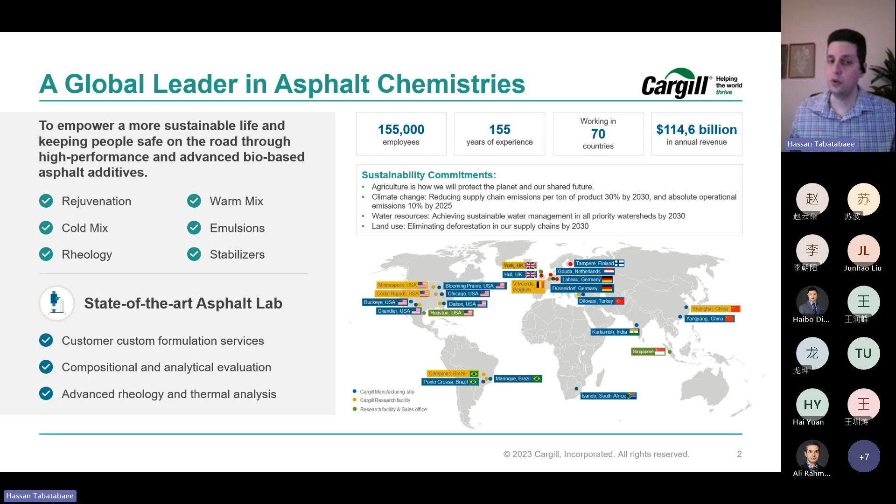Before we get too far, we have the pleasure of working with an esteemed partner in China, the Xiyufa Group, and my dear partner from this company, Mr. Xi Jianxin, is also online, and I'd like to ask him to maybe introduce himself and the company if possible.

Hi. Hello. Can you hear me? Hello. Yes, we hear you. Hi, Hassan. Really nice to meet you again. Absolutely. Nice to meet you. Yeah, good to see you. Thank you. Hello, Professor. Sorry, I'm at the airport.

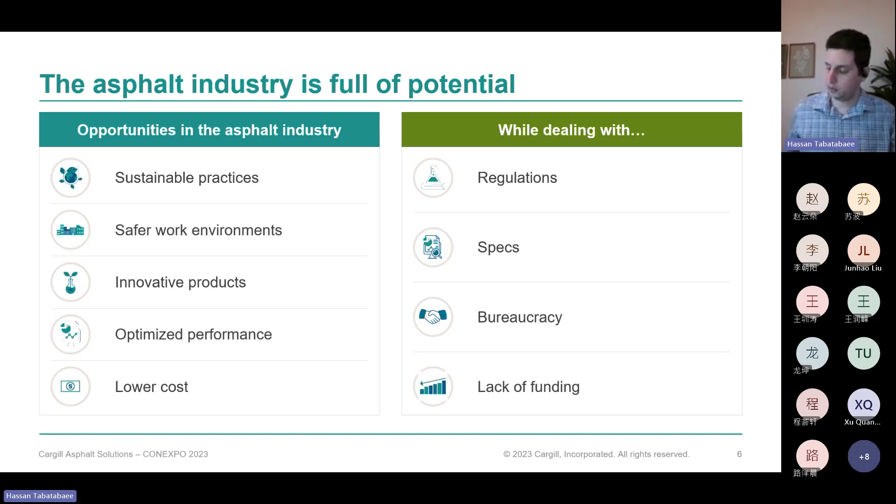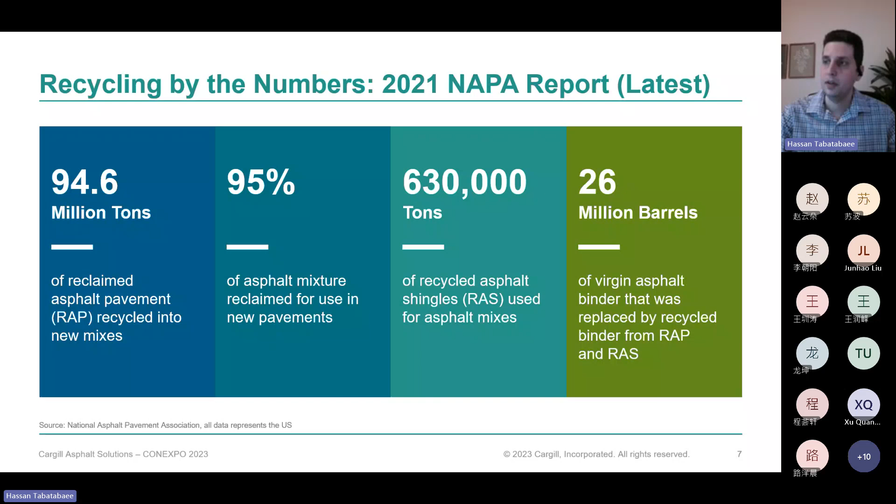Significant amounts of this exist and can be recycled, and this would be equivalent to replacing about 26 million barrels of virgin asphalt. Now, this number of 95% is very promising, very impressive. However, when we look at different statistics we see a different picture. In the US, between 2018 and 2021,

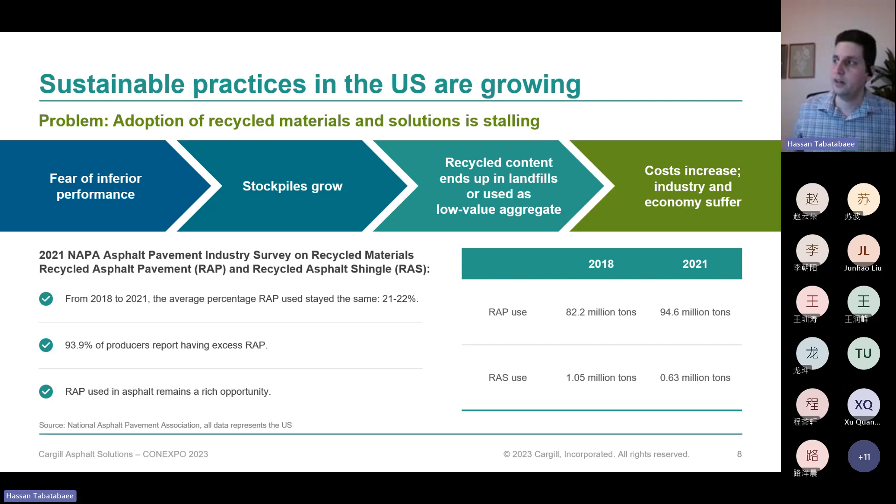although RAP use went up to an extent, it has stayed very consistent as a percentage of total asphalt volume. About 21-22% of asphalt uses recycled material, which is a very low percentage when we look at the opportunities we see in a number of countries with the percent of recycling that's possible. So although 95% is recyclable, very little of it is actually being recycled on average.

When we look at the carbon footprint of asphalt using environmental product declarations, which are becoming more common as report cards showing carbon footprint and emission potential, we see a significant portion comes from the asphalt binder, much less from the aggregate. This is followed by the energy spent operating a plant and heating and drying aggregates.

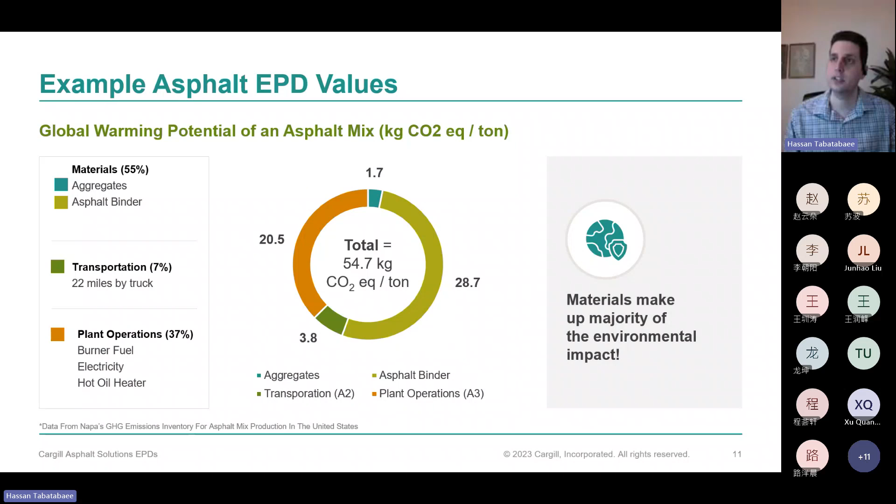So energy for heating and asphalt binder production are the two biggest contributors to the carbon footprint of asphalt, and those are the aspects to focus on significantly when reducing carbon footprint. That's where bio-based technologies come in and have started to be used.

First off, what do we mean by bio-based? This definition can be pretty broad. At the broadest level, it can refer to materials derived from vegetable or agricultural sources, tree-based sources like tall oil, carbohydrates like starches, sugars, proteins and derivatives, byproducts from processes such as fatty distillates, recovered oils, waste products from refining, pyrolysis byproducts, cellulosic byproducts like lignin, husks, nutshells, and animal sources. So a lot of very different materials could fall under the characterization of bio-based.

In the asphalt industry, bio-based has often been used to describe bio-oils, although there are many different types of products referred to as bio-oils.

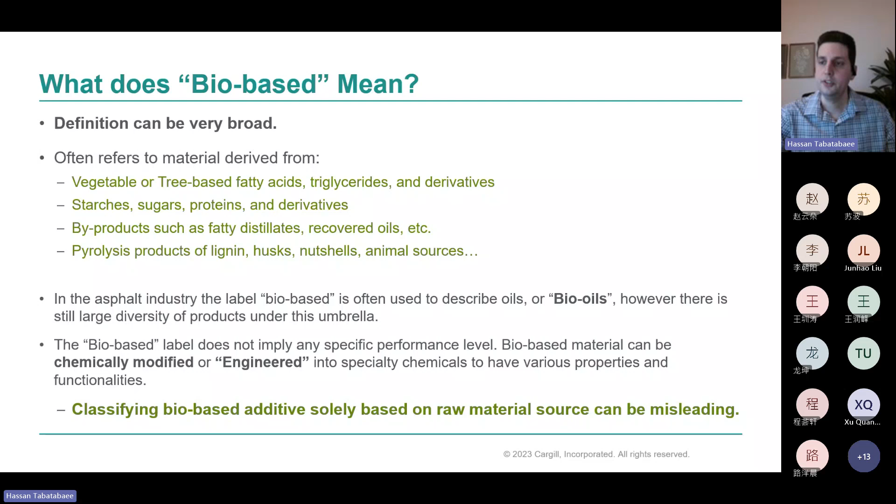One important thing to keep in mind is that being bio-based, given how broad the source materials can be, doesn't actually imply any specific type of performance in itself. Sometimes papers say biomaterials are very good or very bad in terms of some aspect like aging, and these claims are misleading because you have to specify exactly what you're talking about, since performance varies and many of these materials can be chemically modified or engineered to have different properties. So saying something is vegetable oil based doesn't necessarily mean the same thing depending on how it's chemically modified. Classifying biomaterials only by raw material source is misleading—more information is always needed to characterize performance.

So how are these used in asphalt? One of the methods used the longest, though perhaps not as commonly known, is using bio-based modifiers to modify asphalt binder or bitumen. These are often very efficient replacements for aromatic distillates or other petroleum-based oils used to soften asphalt. Here's an example showing performance grade modification from a PG 64-22 to PG 58-28.

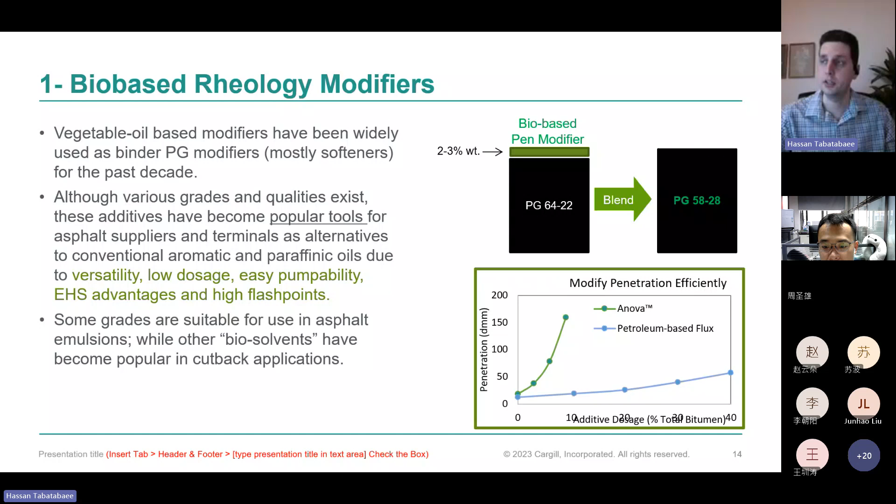Only 2 to 3% by weight can achieve a full grade change. For those familiar with the performance grading system, one grade shift of 6 degrees means cutting the viscosity about in half. Looking at penetration, you see a similar range where 0 to 10% of a bioadditive can have much more impact than a flux oil might have. For this reason, these have become quite popular for modification of asphalt binders and creating softer bitumen grades.

Another category where bio-based chemistry has more recently become common is warm mix or low temperature asphalt. In this category, organic additives have commonly been used in the past. The term organic does sound like bio-based, but that's not necessarily the same thing. Fischer-Tropsch wax, which comes from coal processing, has often been used to plasticize asphalt by creating a melting point near the processing temperature, allowing for lower temperature processing as a plasticizer.

However, their use is not as common in North America and Europe. What has become more common is the use of chemical warm mix additives that are surfactant-type modifier products, able to work without modifying the grade of an asphalt binder. Although these have commonly been amine-based chemistries, more recently there are more bio-based versions coming into the market.

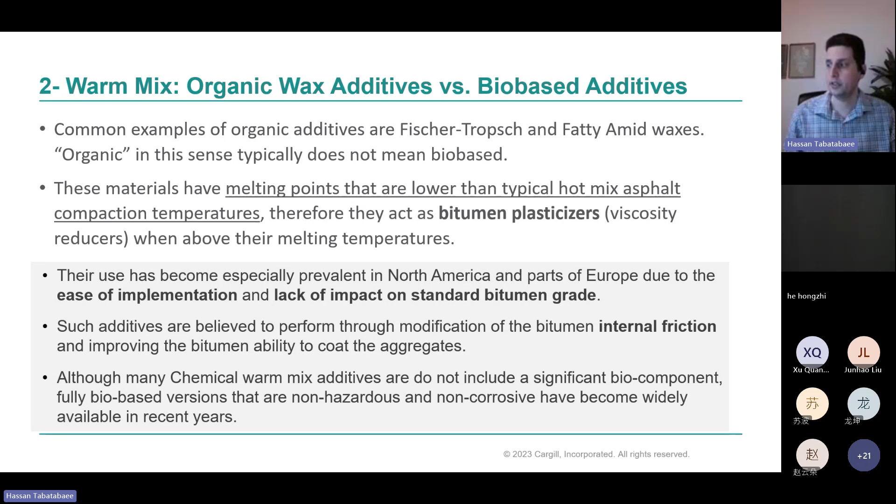When we talk about chemical warm mix additives, these are additives believed to perform by modifying the internal friction in a bitumen film, which allows for better movement of aggregates, workability, and compactability. They also, as a byproduct of that impact, often work as wetting agents. They modify the surface energy and surface tension of an asphalt binder and the bond characteristics at the interface between bitumen and aggregate, and can help as adhesion promoters.

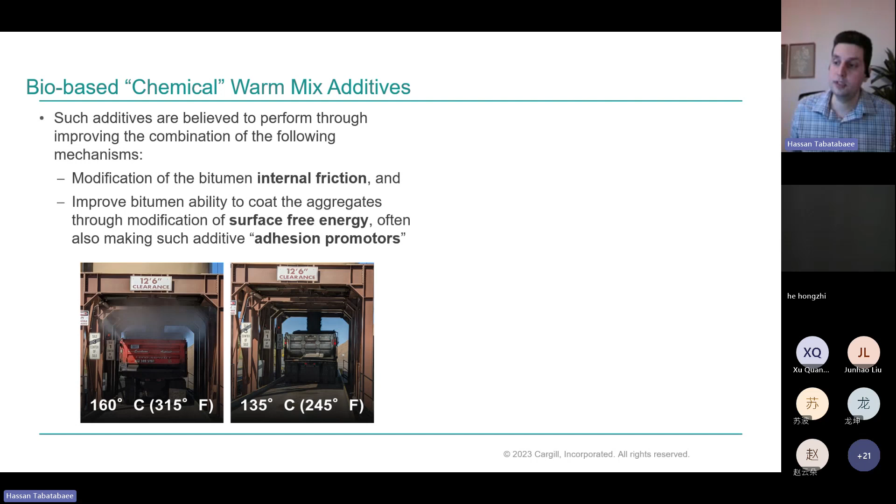What makes these more attractive than a wax is the fact that they do not change the grade of the bitumen. As you can see, you can achieve significant drops in production temperature, and sometimes much lower than the temperatures even seen in this example with the use of such additives.

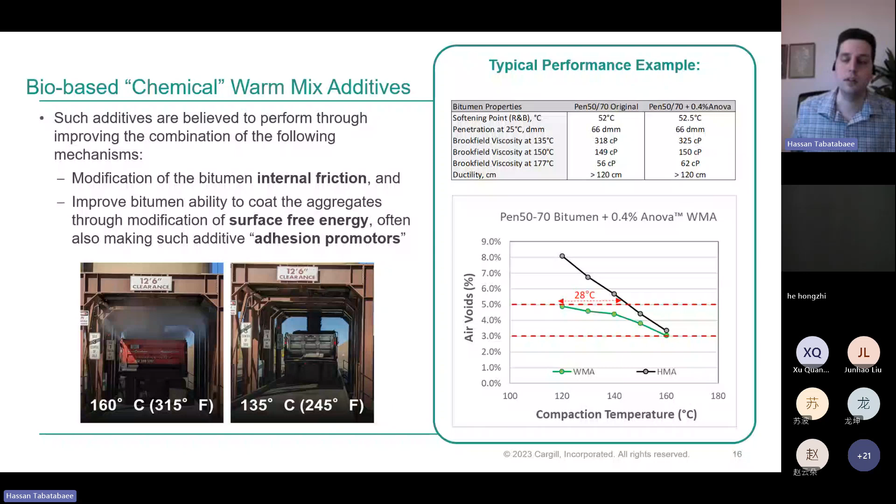And you can see at certain points there's a significant shift in the compactability temperature. You're achieving similar air voids with the warm mix at 20 to 30 degrees lower temperatures than you would with the hot mix alternative. That means lower fuel use and lower carbon footprint.

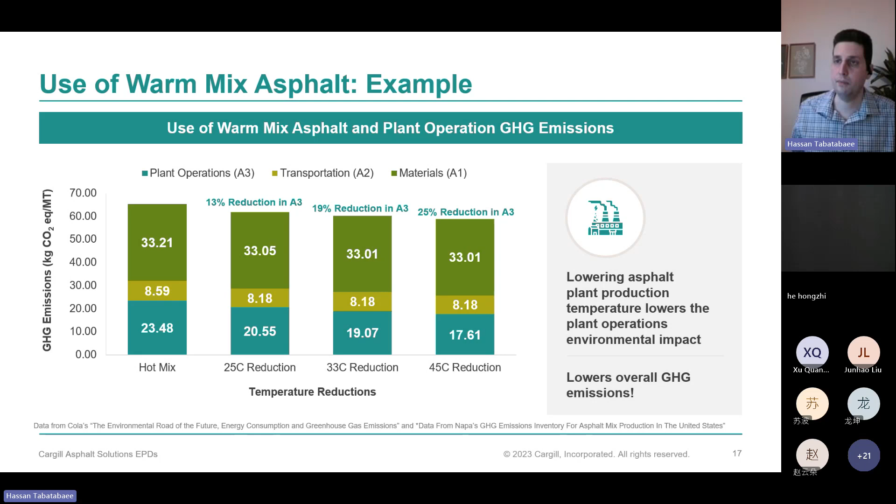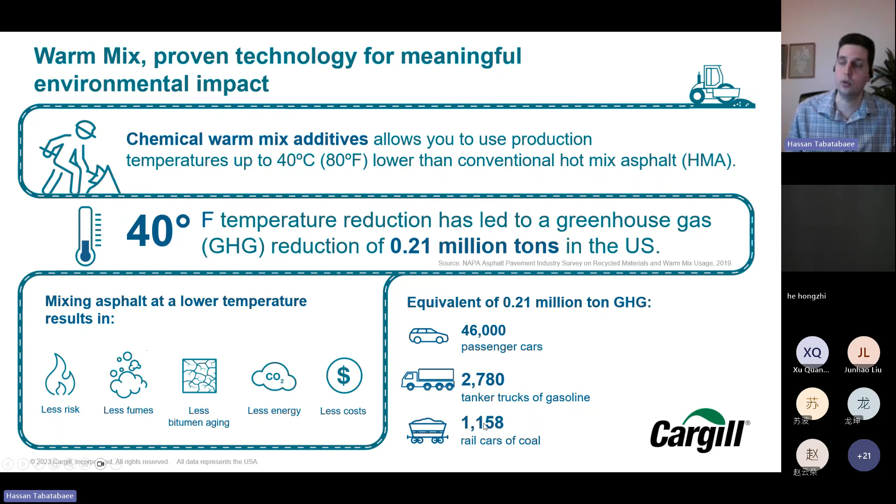Looking at that, it's estimated that in the U.S. alone, if a 40-degree Fahrenheit reduction in temperature was implemented using a warm mix additive, about 0.2 million tons of GHG would be reduced, which is equivalent to taking 46,000 cars off the road, or reducing about 1,000 rail cars of coal. These can start making a difference.

Now, the last category that I'll focus on more is the recycling agents. This is where bio-based technology is becoming probably the more popular version that's being used in some markets, especially in North America and Western Europe.

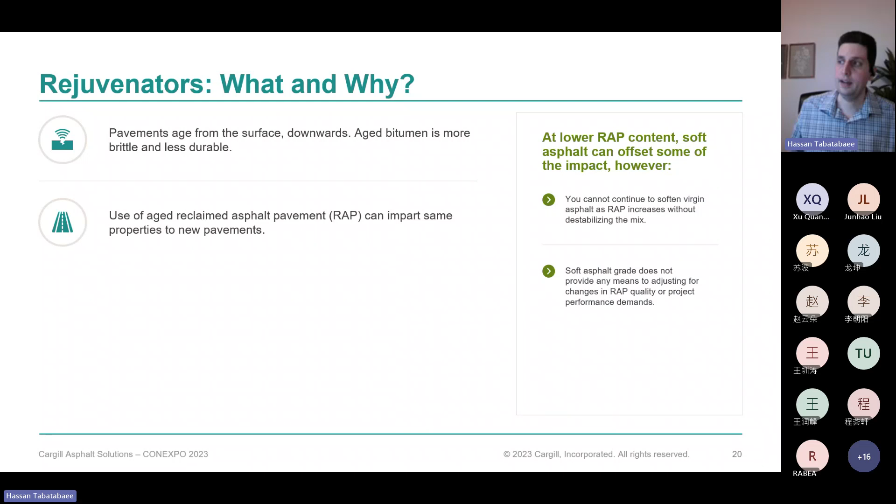So rejuvenators or recycling agents aren't a very new concept, they've been used for a while. They've been used because, as you know, asphalt ages and becomes brittle, and to use more of that recycled pavement, you need to soften it.

Back in the 1970s and 1980s, the use of petroleum-based recycling agents, which were mostly based on lube oils and paraffinic byproducts, started to become popular. These were used quite often, especially around the 70s when oil prices started to go up significantly and recycling became a lot more attractive.

However, I would say in the late 2000s, recycling oil had another resurgence with the price increase of asphalt at that point. However, we started to see a lot more bio-based recycling agents coming into the market.

Recycling agents have advantages for use in recycling over using a soft bitumen. Part of it is because there's only a certain amount of bitumen softening you can do before you destabilize the mix, and it becomes a lot harder to balance the rutting and cracking performance at higher RAP contents when doing this.

For those of you interested in getting a deeper history and overview on how recycling agents are used, I would definitely suggest looking up the NAPA, the National Asphalt Pavement Association in the US, QIP 131 report, which is downloadable from their website online, a practical guide to using recycling agents. So the information I'm presenting today is also discussed in more detail in this report.

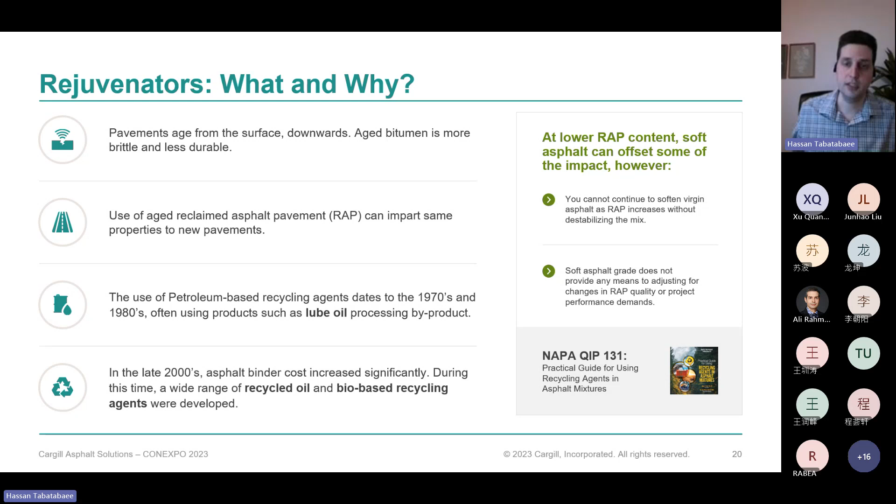So a recycling agent overall is going to improve cracking resistance, that's the main goal there. It might decrease the high temperature stiffness and have some softening. Generally, it's not going to impact moisture resistance. It might improve compactability, as we'll see, and of course, you're looking to increase the recycling content.

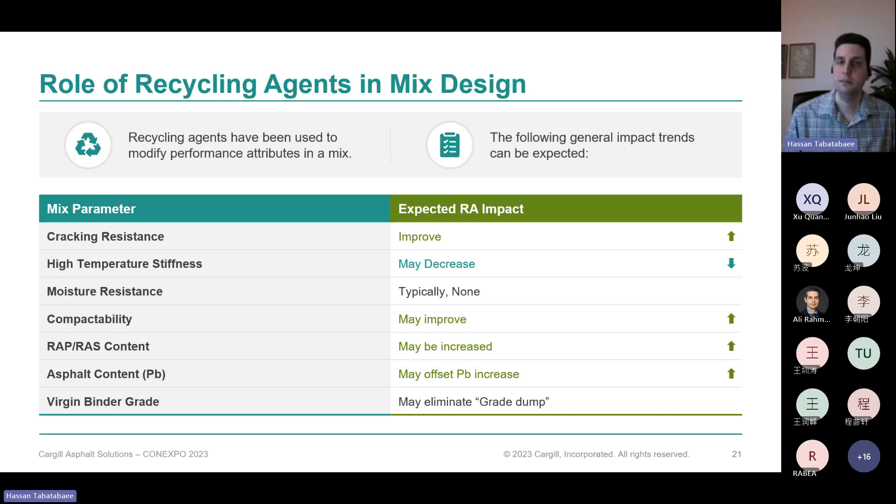You may not need to increase the asphalt binder content as much as sometimes people do when using recycled asphalt. It can also help eliminate what is sometimes called a grade dump, meaning using a softer grade than usual in an asphalt mix because you're using recycled material.

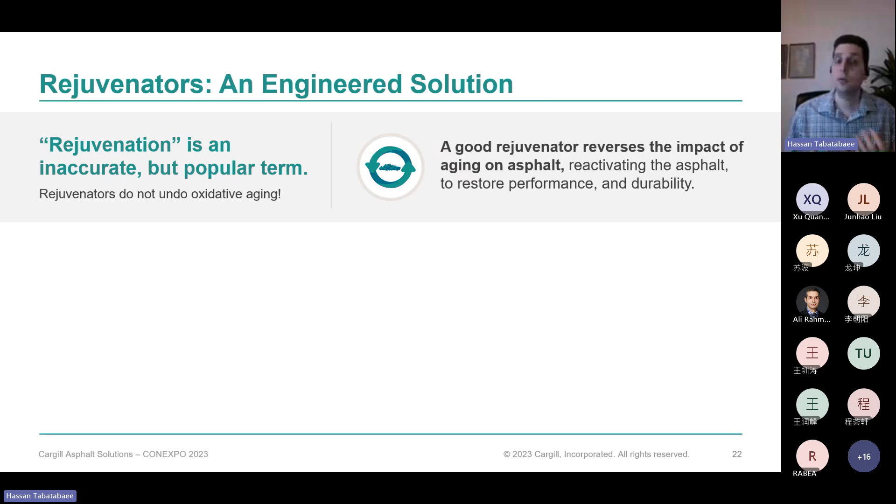So rejuvenation as a term is popular, but it's a little inaccurate because it seems to imply they are undoing oxidation. Rejuvenators are not chemically undoing oxidation. What they're doing is undoing, through a physical, chemical, more polar interaction, the impact of aging and oxidation on the performance, brittleness, stiffness, and durability of an asphalt pavement.

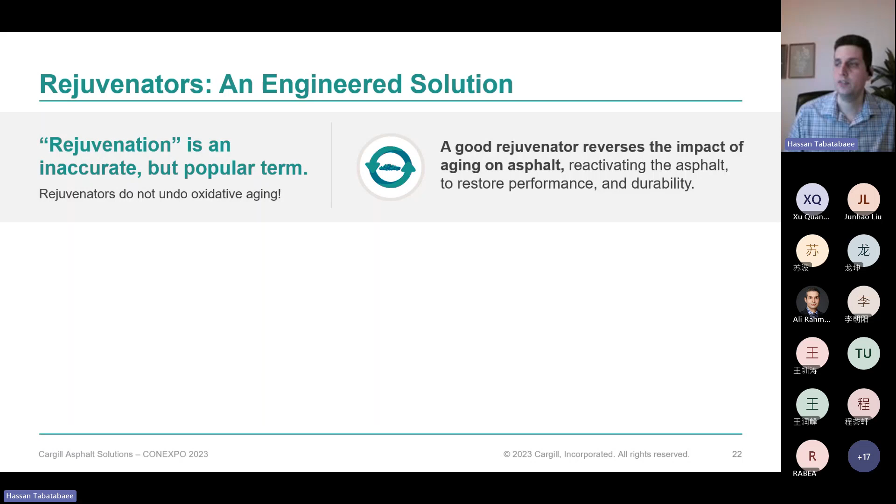Ideally, this means restoring the cracking resistance by overcoming the embrittlement that occurs in aged asphalt as it gels through the association of the more polar, heavier molecules, the asphaltenes, as they build up and become more prone to association in an aged asphalt.

However, it helps maintain rutting performance by being effective at lower dosages. It improves workability, compaction, and appearance. And importantly, a good rejuvenator is going to improve aging susceptibility of the pavement so that it has equal or better performance than a normal asphalt would.

Finally, it will provide predictable and reliable results. You need to be able to know how it's going to impact your mix to be able to use it as a tool. Using recycled material sometimes adds a little bit of uncertainty, so the rejuvenator needs to be a predictable part of the design component.

Get all of that, and you've got good rejuvenation performance.

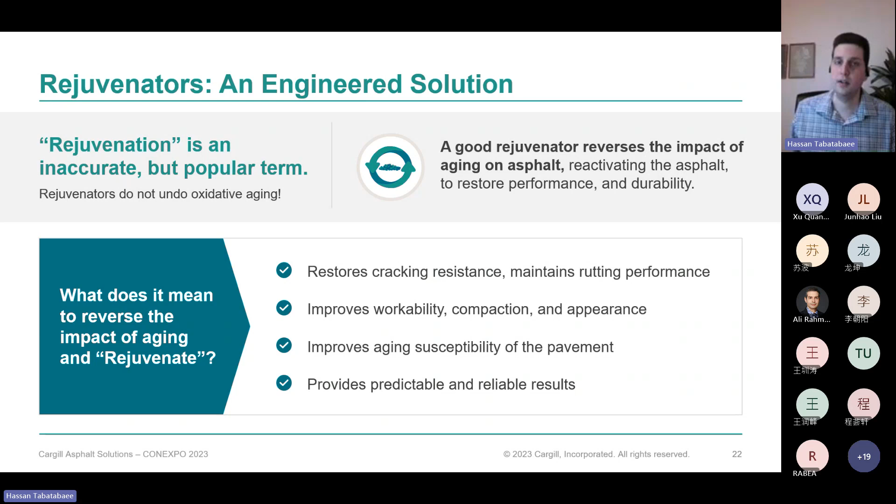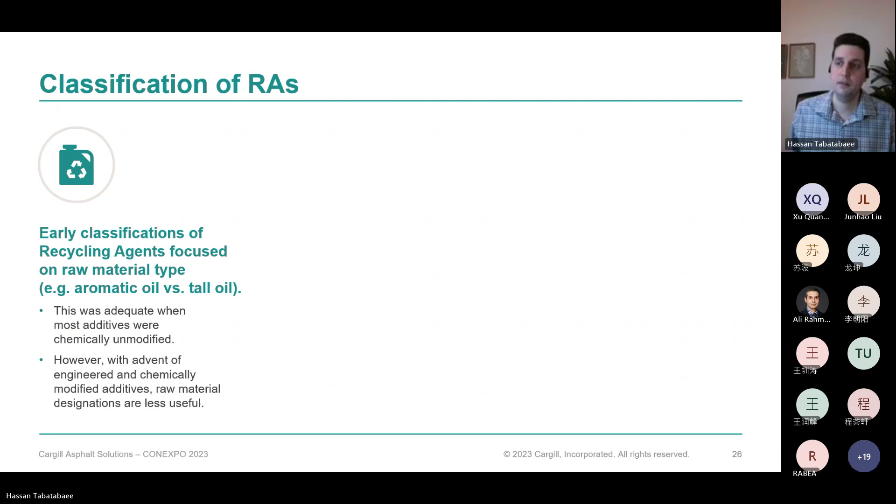Recycling agents are classified in a number of different ways. Early classification systems were based on raw material source, which, as I mentioned, is not the best way to do this, especially when there's chemical or physical modification of some of these materials. So the best specification system is based on the chemical and physical properties of the additives themselves.

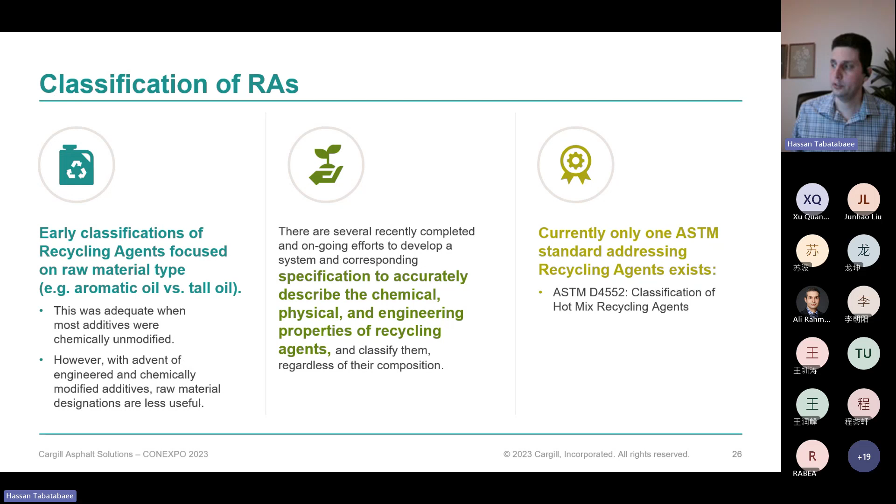There are a number of different ways these are looked at, but one of the most commonly used today is ASTM D4552. This is a simple two-page standard with a table that probably some of you will find very familiar. It essentially describes recycling agents as a function of their viscosity, and has basic requirements for flash point, amount of saturates, and the aging resistance of the material.

In 2020, an RA0 category was added, this being the lowest viscosity one, to better describe bio-based additives. Generally from the 80s, the table had everything from RA1, which means a viscosity of 50 or higher. However, this was found not to be suitable for bio-based additives, which today are actually the most common additive used as a recycling agent in North America and Western Europe. So the RA0 category was added with lower viscosity, without changing the other criteria of RA1.

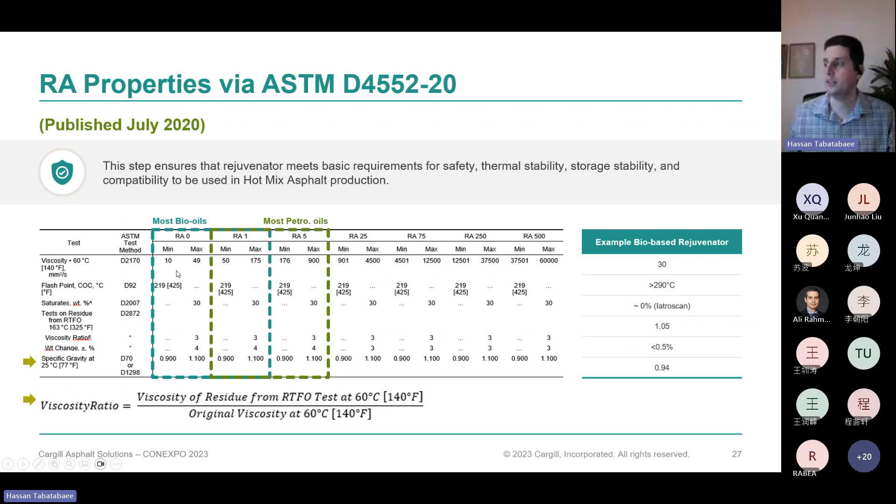Simply, it was an expansion of the table that now makes it apply to both bio and petroleum-based additives. Most petroleum-based additives used in bitumen are probably in the RA1 to RA5 range, which is slightly higher viscosity. You can see here an example of a bio-based rejuvenator with a viscosity of 30 at 60 C, which falls squarely in the middle of this RA0 category and can easily meet this criteria.

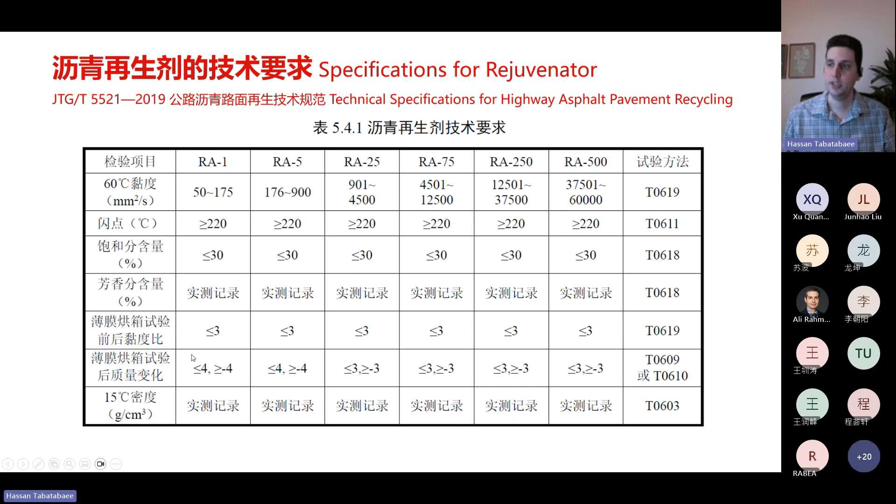There's a pretty similar table here, from the specification of highway asphalt pavement recycling requirements in China, with similar requirements to the ASTM table. However, it does not have the 2020 update that occurred in the ASTM table, which added the RA0 category for lower viscosity, allowing the use of bio-based additives with this specification without changing any of the physical chemical requirements here.

So how are warm mix or rejuvenator additives used? Depending on the additives and the type of plant being used, both recycling agents and warm mix additives can be added in a drum plant or a batch plant, added into the virgin bitumen. This is a very common way of adding these.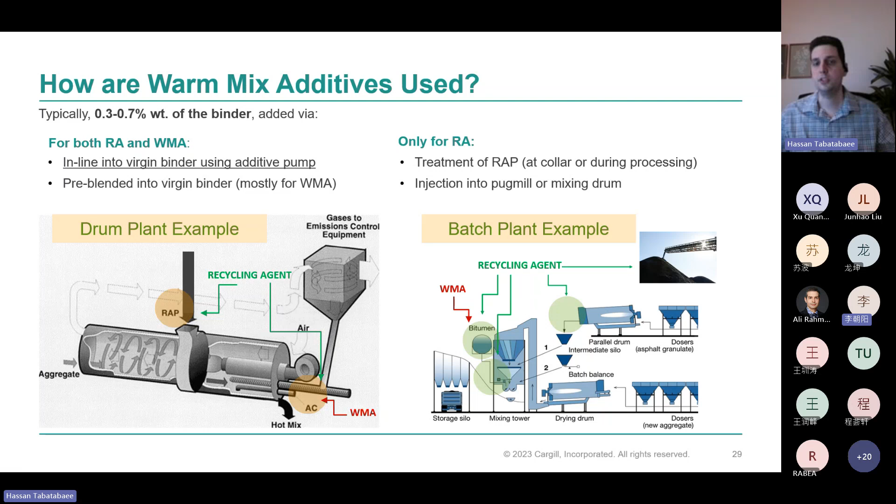This is usually used with an additive pump and it is injected into the virgin bitumen. At a drum plant, that would be into the pipeline going into the drum for a continuous plant. And in a batch plant, that would be going into the balance of the bitumen with an additive pump. As the bitumen is filling into the balance, the additive is added in there.

With a batch plant, there's a few other ways that rejuvenators are being added. A lot of folks in Europe do this. They spray it on the RAP itself on the spray bars. This might be before or after going through a RAP dryer. Some people actually spray it in the pug mill at the very end and mix with the blend. However, for warm mix additive, you can only add it to the virgin bitumen. So that will always need to be injected into the balance.

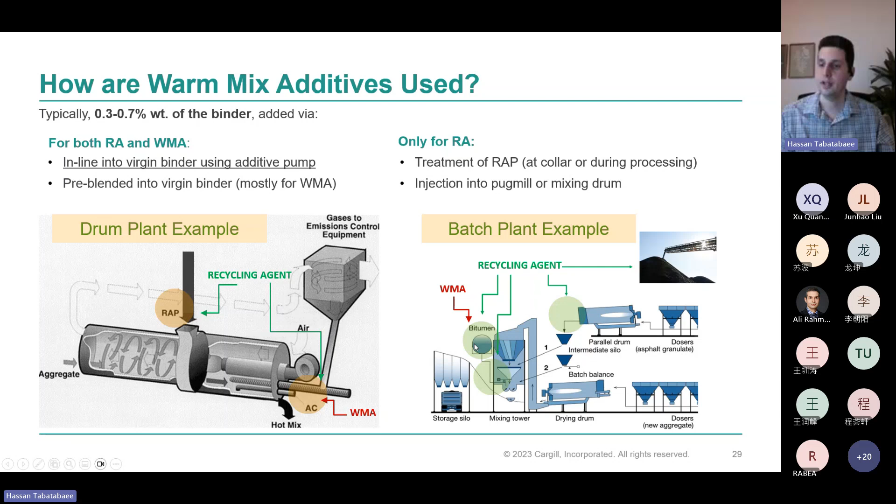As I mentioned, a lot of times one of the first things that you will see with the recycling agent is an improvement in workability and compaction with higher RAP. As you can see very clearly here, with a reduction of temperature, you're not only maintaining compactability, but you're improving it, which is significant when you're going from 30% to 50% RAP.

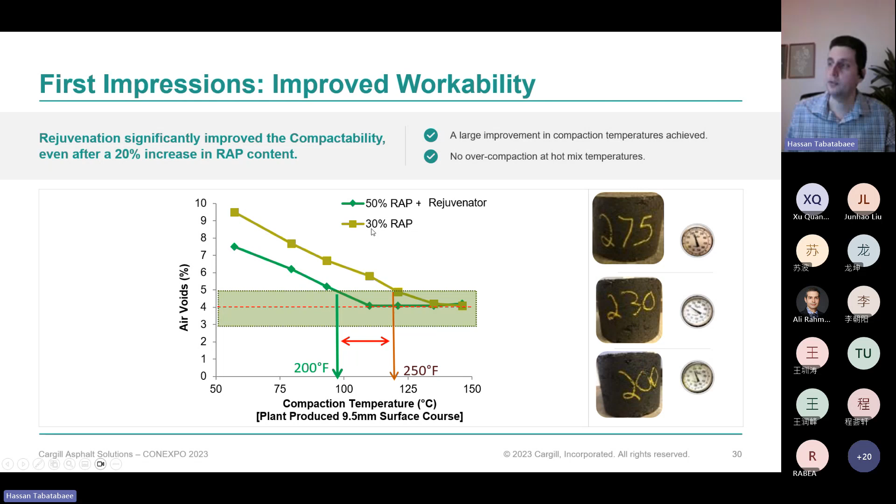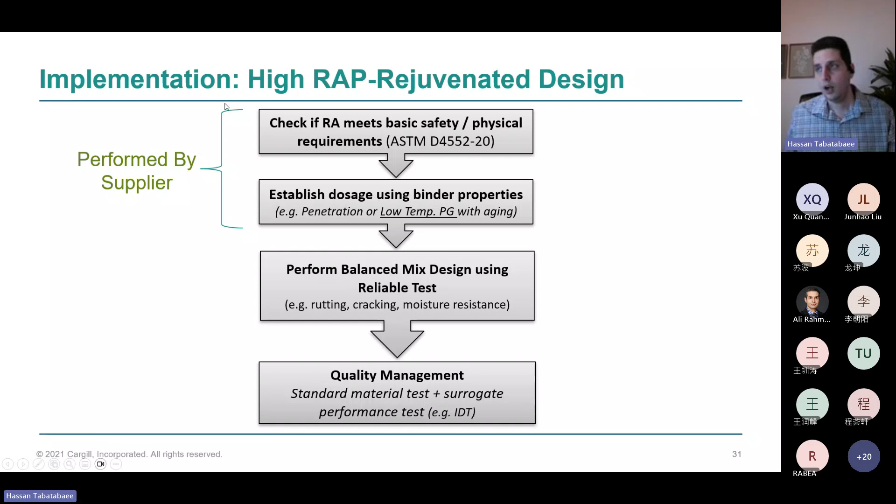For implementation, for time, I'm not going to go into too much detail, but generally there's a few steps that are happening. You look at the basic requirements using something like the ASTM table or the table in the Chinese standard. And look at determining the dosage based on the bitumen properties. That might be with penetration, could be softening point, could be with low temperature performance grade. Often the additive supplier is a big part of this conversation here.

After that, the design is confirmed using a performance-based design. Usually that is a normal design with some performance testing checks using locally accepted performance tests. And quality management is generally not going to change very much from what's normally done. There may be a higher frequency of RAP burn tests where you do the gradation and binder determination.

Generally, for local or private pavements in North America, the first two steps are the only ones that are really done, and a dosage is established, and after that is basic quality management. Not a lot of mix design; at the mix level, you're not doing performance testing. However, sometimes when working with agencies for public mixes, the agency will require those additional mix tests in order to qualify that final mix.

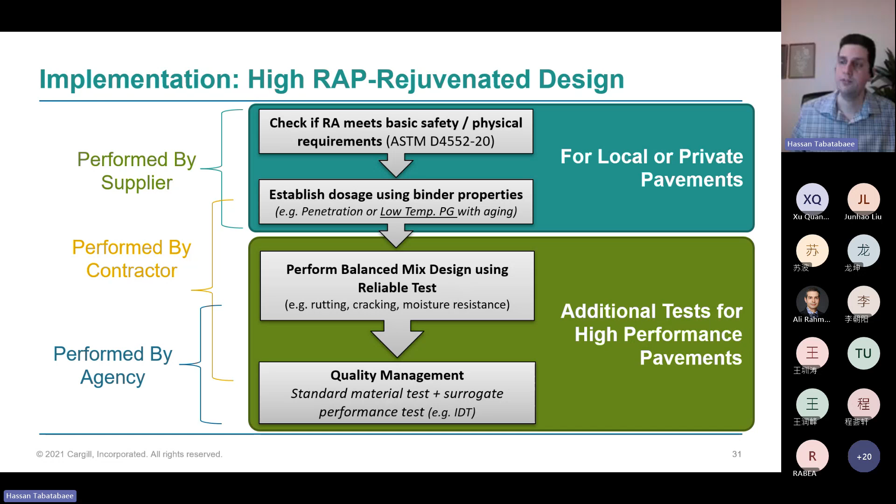The dosage determination is going to be done generally by classification of the recycled asphalt binder with extraction recovery, looking at either penetration, low temperature properties, or various rheological aspects. And then using that, you can determine how much dosage of additive is needed to get, say, a standard mix that maybe only has 10% RAP to like 15, 20, 30, 40% RAP while maintaining the same properties. That can all be calculated by determining the properties of the basic asphalt binder and the RAP that would be used in it.

Some changes sometimes are made on the mix design process when you're using a recycling agent with high RAP. The volumetric part might not change too much. There may be some performance tests like an indirect tensile strength or a wheel tracking test that might get added. However, a specification will require a loosening up on the maximum RAP content allowed.

If a specification has a dust to binder ratio, that is a ratio of the passing number 200 mesh, the 75 micron mesh, to the binder content, that requirement might need to be modified because usually recycled RAP will have more dust on it, so it'll be hard to meet these. And that also means the average film thickness of bitumen on the aggregate might decrease. So if a specification has film thickness requirements, those will need to be modified.

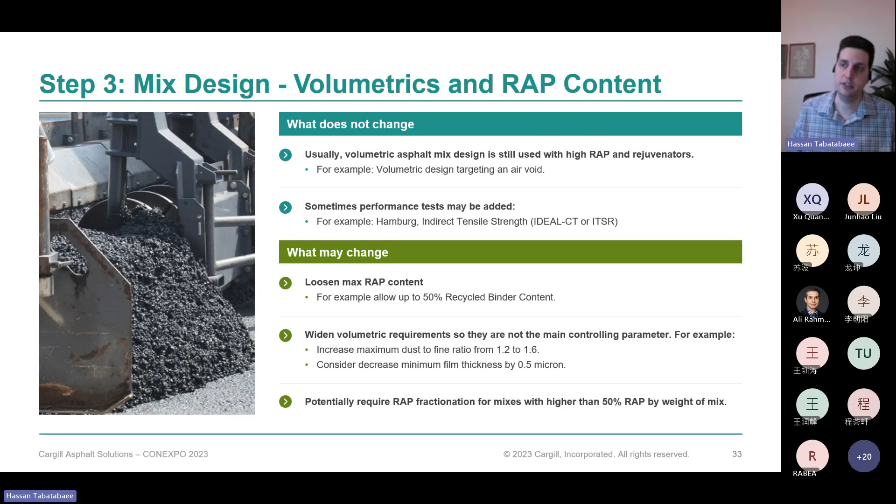So here's some implementation examples that I will go through quickly as I see I'm getting towards the end of my time. The National Center for Asphalt Technology, this was a very important test done at this world-famous test track in Auburn, Alabama, where trucks like this are driving every day on 3-year cycles over these pavements to load them. And they put 10 million ESALs, equivalent single axle loads, over a 3-year period.

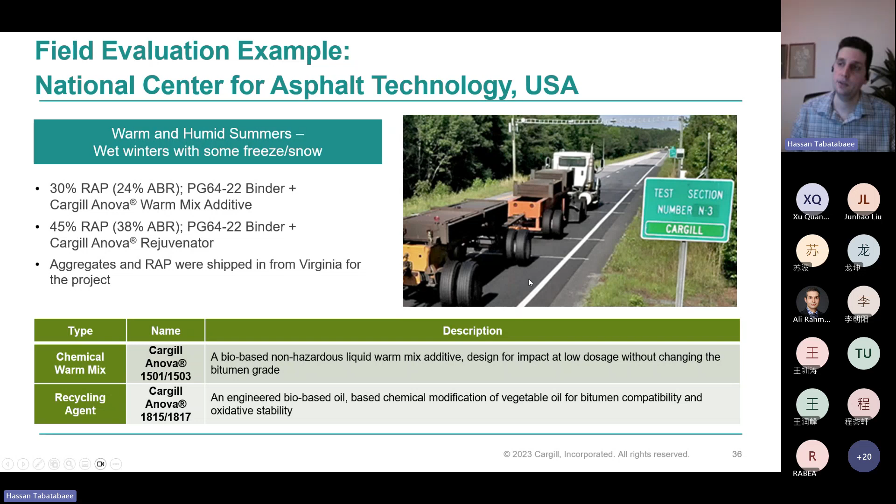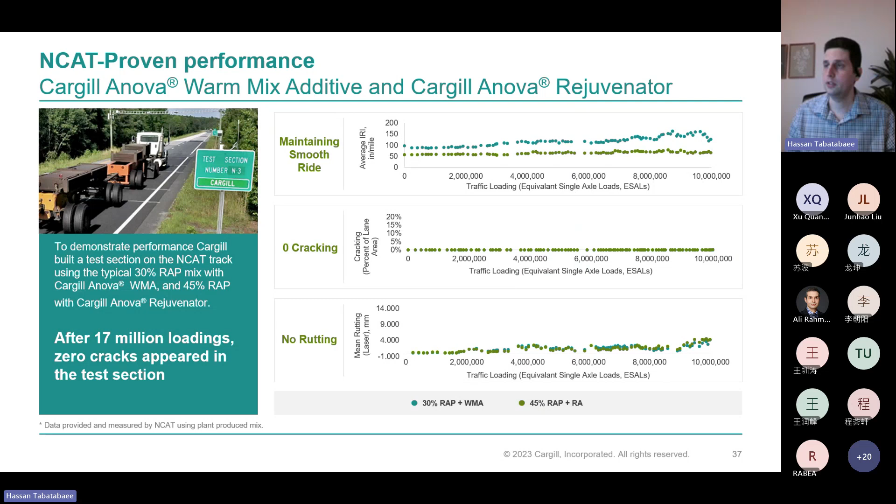However, as you can see, 0 cracks in both sections throughout this pavement testing. This is from the first 3 years, 10 million cycles, and I can tell you at this point, after nearing 20 million, there is still no cracking, and there was no significant rutting either, less than 5 millimeters of rutting. So very significant loading and nearly no distress or damage after more traffic than most highways would take in the US.

Another example was done at a much cooler region. This is close to where our lab is in Minnesota. And again, this was designed for low temperature cracking resistance, 45% RAP. So performance testing was showing that performance was equivalent or better. However, the important thing is after 5 million ESALs of real traffic that's going on. This is a 4-lane highway, a 3-lane highway on either side.

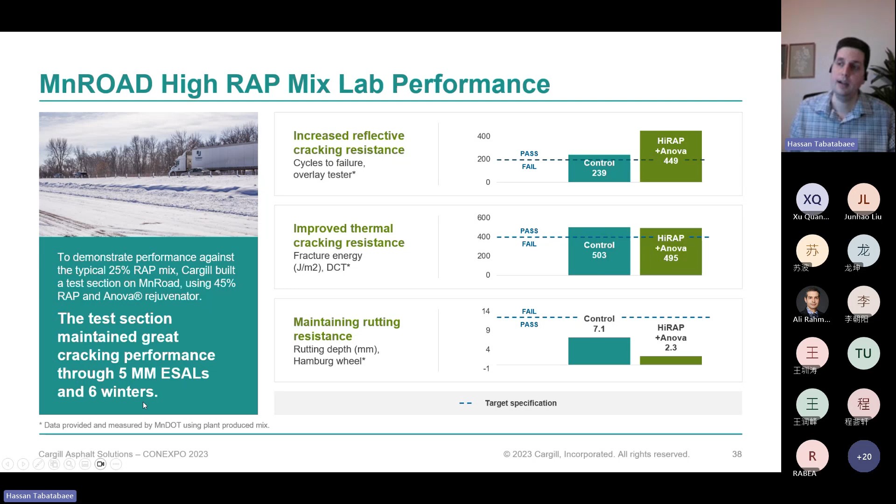And 6 winters, including one of the record coldest winters in Minnesota, which is one of the coldest states in the US, there has still been no need for maintenance on this road, which generally has to happen because there's a lot of transverse cracks that open up very widely. So definitely, there's no need to sacrifice pavement performance, as shown in these two test sections, at high RAP content.

Here's an example of 70% RAP in the Netherlands. The Netherlands have been using recycling agents and rejuvenators for 70 to 85% RAP for years now, and they have performance testing using their beam fatigue testing and a dynamic rutting test. And you can see here that actually using a paving grade asphalt with the rejuvenator, you have a better ability to balance performance, cracking resistance against rutting, than you do if you use a very soft bitumen like a Pen 160-220 for the same mixes, where you are unable to meet cracking without failing the rutting performance.

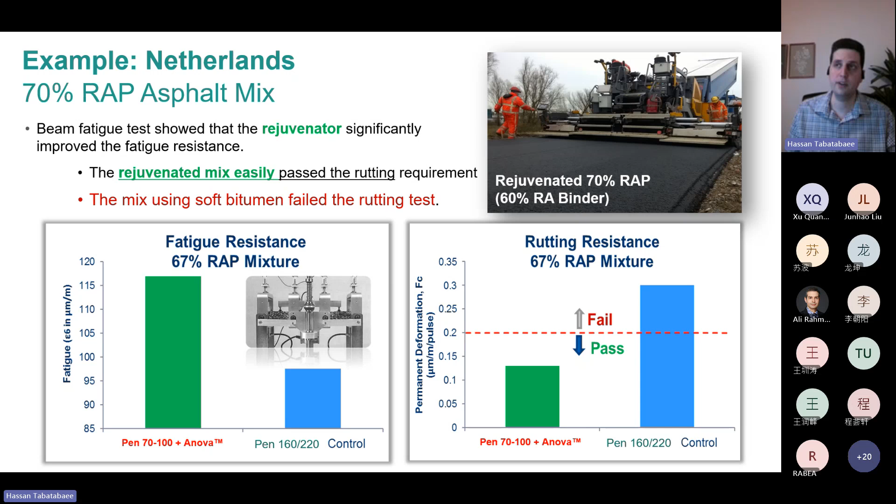This is very normal performance. I would say at this point, maybe 70% of the asphalt plants in the Netherlands are using this type of technology. So very common to use this very high RAP content with rejuvenation.

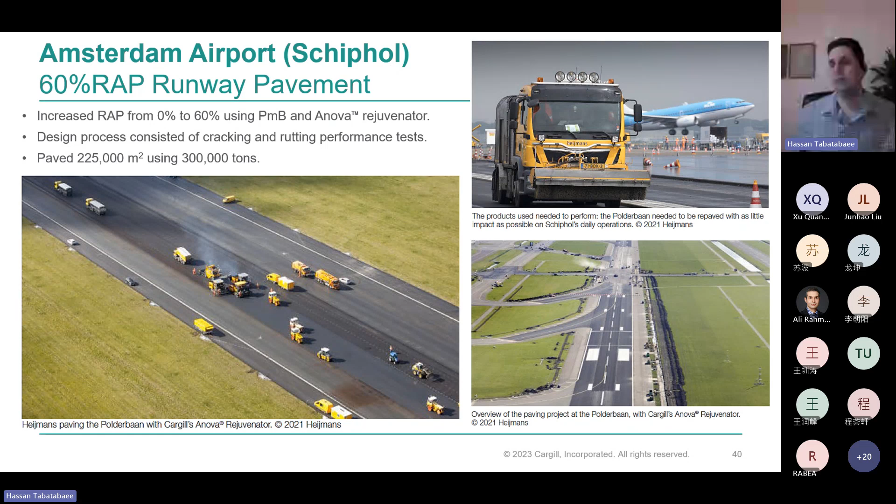Here's an example of a runway. This is the Amsterdam Airport, Schiphol, a very major airport in the world for international flights. And this was done, again, 60% recycled. Normally, there's 0% recycled, and they're doing 60% recycled now on their runways using rejuvenator. So these don't need to just be used in low severity mixes or low service level mixes. These are being used in pretty high impact, high service pavements as well.

And last but not least, this has been tried out in a couple of examples in China as well. And I don't know if Mr. Ding, I see you're on. I don't know if you are in a place that you can speak to these or not, but if you are, do you want to briefly describe these trials?

Oh, perfect. Yes. I just got off the train, so just in time.

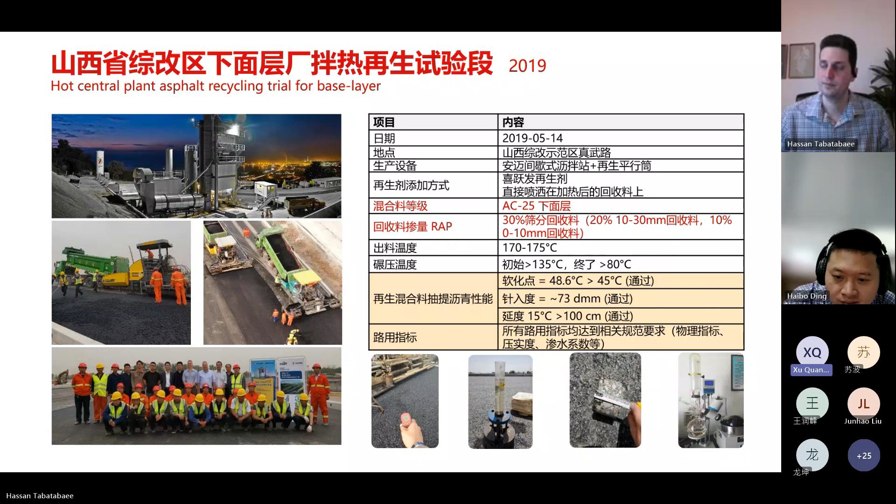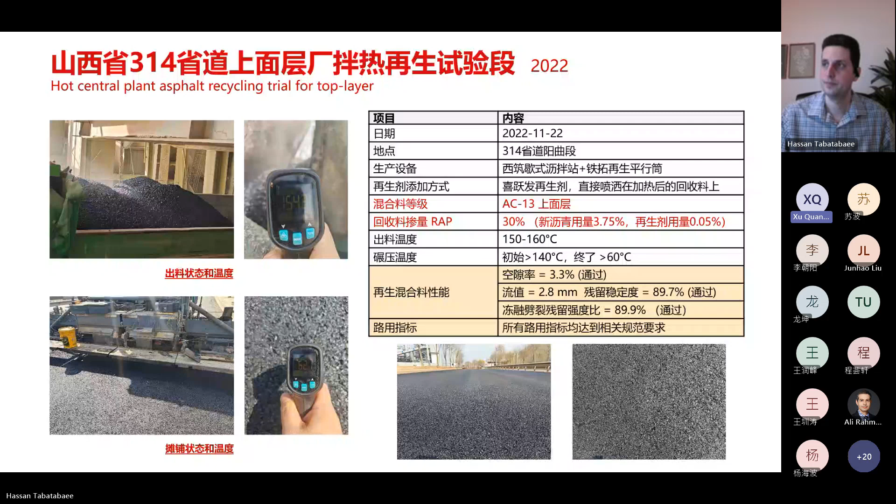Yes, starting from 2019, we have started to use Anova rejuvenator in our asphalt mill. We have two asphalt mills here in Shanxi with recycling ability. One is with Ammann from Switzerland, and the other one is a Chinese mill. And we are also using this on top layer recycling and use that in the top layer, because this is what we are trying to do, upcycling instead of the downcycling like we always do, to just use it in the base or middle layer. The performance for now is all very good.

And after testing our sample, they were sure that by just using our own single component Anova rejuvenator, they can achieve both rejuvenation and also warm mix property. So that's also a very good indication for the property of Anova and the bio-based rejuvenation technology. So yes, that's the development here in China so far.

And thank you, Hassan. Thank you very much for that.

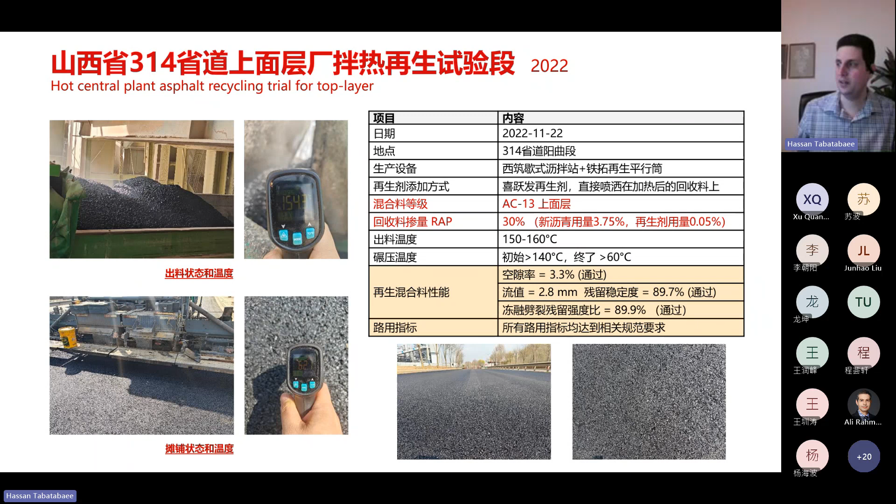Yeah, and so in conclusion, there's I would say millions of tons of asphalt being put down right now around the world using these rejuvenating technologies for high performant mixes. There's multiple ways for getting low carbon asphalt, as we talked about. Increasing RAP content is one of them. Replacing fossil-based bitumen with bio-based material, of course, is offsetting some of that, and reducing production temperatures. Some of these are not experimental anymore. These are very much real-world technologies that are being used quite commonly now.

The NCAT and MnROAD studies that I showed have been used as a reference for a lot of agencies that are looking to implement these technologies because of their third-party, independent, reputable sources for field data. And looking at that experience and what was presented here, the summary, that 4-step process of using a criteria for classifying and certifying recycling agents, then initial dosage based on RAP and binder properties from extraction, and finally, verification of design using performance testing or standard quality testing is a very practical process with small modification to be able to use these recycling agents and recycled content.

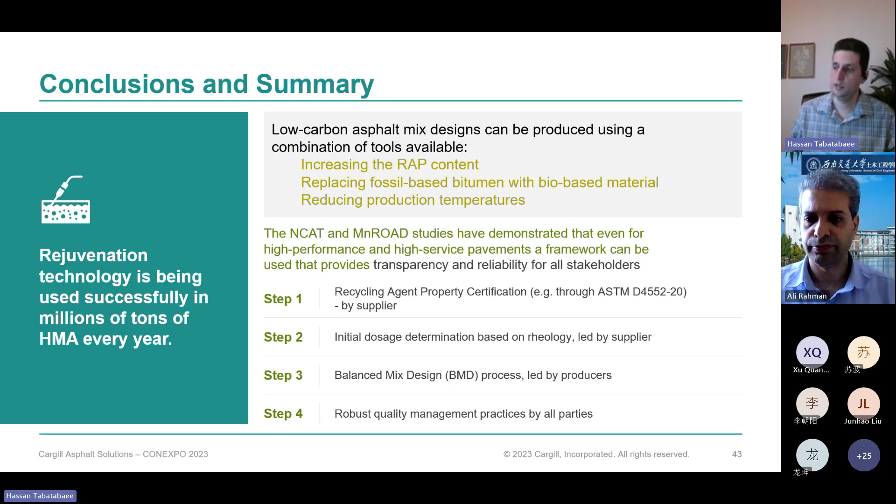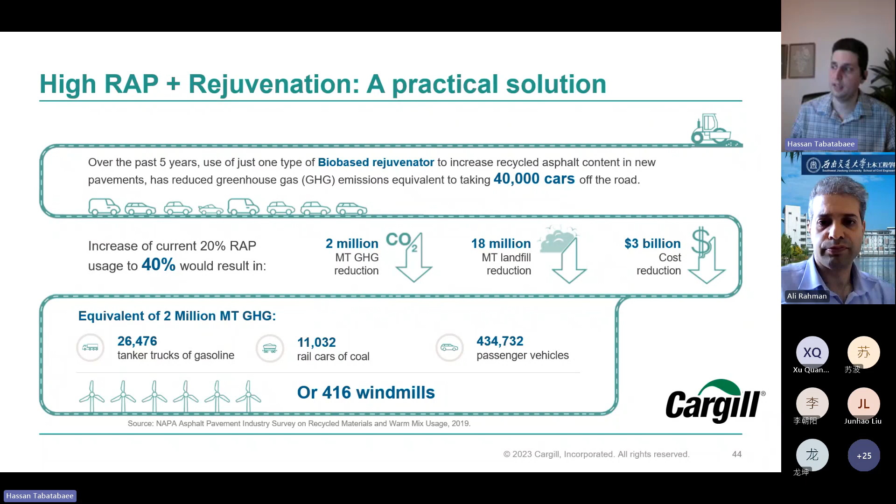Of course, quality management is always going to be important. And you can see here, high RAP and rejuvenation. There's significant impact with just going 20% higher recycled content, as you can see, the millions of tons of GHG reduction. With that, some of the references I've used and some of the stuff that I mentioned.